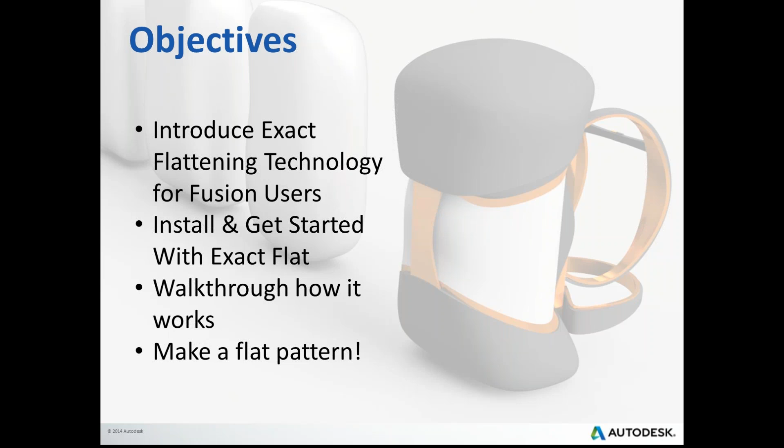So Cliff, go ahead and take away and tell us that process. Sure. So Mike just talked about how this is extending the functionality of Fusion. For those of you that aren't aware, the Fusion Exchange Store is intended to allow Fusion to rapidly grow and meet the needs of specific customers. In this case, those specific customers are in the soft goods industry.

We talk about the soft goods industry as products covered in fabric or made from vinyls and composites. So sporting goods, bicycles, helmets, furniture, boats, boat covers, automotive interiors, balloons, turbine blades, all of those types of things.

And the challenge has been that for soft goods manufacturing, the processes tend to be extremely manual and labor intensive. Just as we've been using 3D CAD and CAM in the past 20 years or so to accelerate both pre-production and final production of hard goods, we're now going to be doing the same thing for soft goods manufacturing. This enables companies that take advantage of 3D to get the same advantages for their soft goods manufacturing as they have for their hard goods manufacturing.

We're going to show you in this presentation, if you're involved in this industry at all and you're doing anything with soft goods, you know how long it takes to capture the information, get the dimensions, make a pattern, test it, redo it, iterate, and get it right. We're going to take you through a process that shows how we can do it, if not twice as fast, but in some cases 10 times faster than you're doing it today. It's a bold claim, and our experience has shown that it's not just a bold claim, but it's also true.

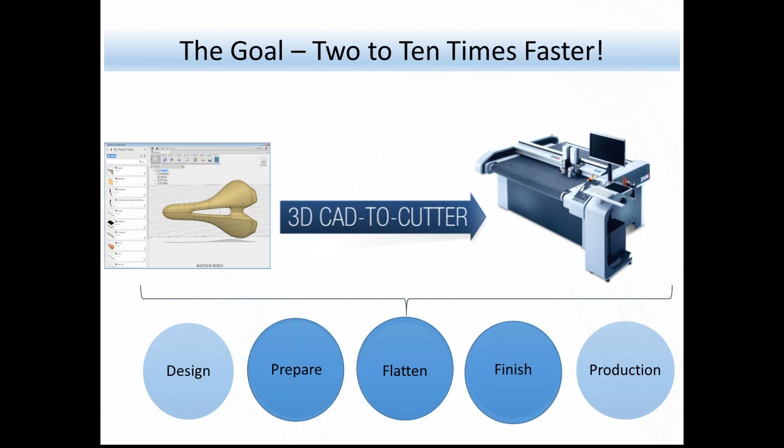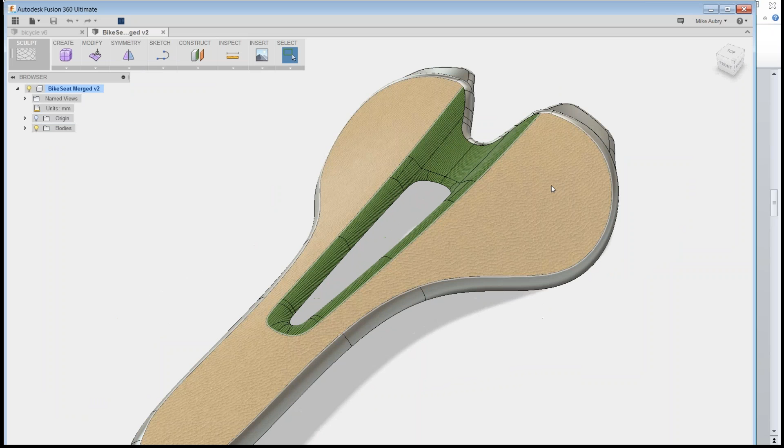Thanks, Cliff. So guys, let's show it off. We're assuming since you're on the Fusion webinar that you all have Fusion and love it to death, and why wouldn't you? I'm going to start with this bike seat, and where we're going with this is we need to make it so that for this leather piece, you can figure out what the shape would look like in a flat piece of leather.

So what we're starting with is something just created in Fusion, and we're going to leave the sculpting environment and go into the patching environment. This is the area of Fusion called the surfacing space, and there's really only one tool we need to use here. We need to merge all of these faces together into one face, which will be uploaded into ExactFlat.

Before I get started, I want to show you how I got ExactFlat in the first place. It's an add-in, and the way you get it is to go to the Exchange server. If you just Google 'Fusion 360 Exchange store,' you'll see the Autodesk Exchange apps, and there's an add-in called the ExactFlat Online Publisher.

Let me give you the link here. If you look in your chat panel, I'm posting this right in the chat so you don't even have to Google it, just click on it. If you install that, it's free first off, so you can choose between Mac or Windows 64, the same platforms we support for Fusion. Just go ahead and click the free button.

Then it'll ask for your Autodesk ID, the same one you'd log into Fusion with. Go ahead and sign in, and it'll start downloading, much the same way you installed Fusion, giving you an executable file. You'll see a little MSI start downloading, and you just double-click to install it. I've already installed it, so I won't go through that part with you, but I trust you'll be all right.

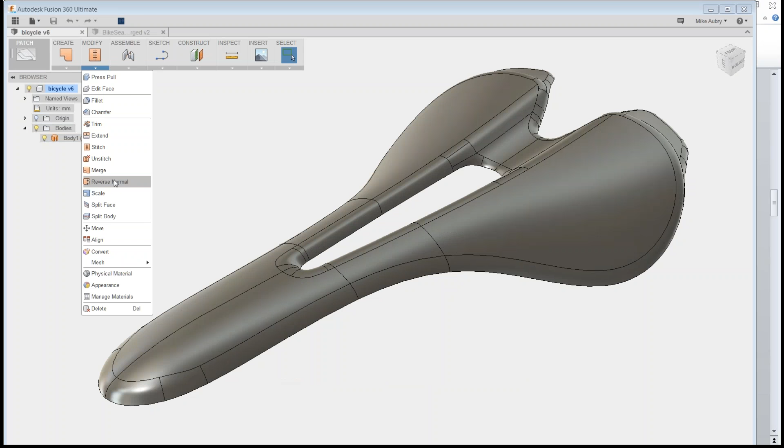Once installed, you'll see a button appear, 'Upload to ExactFlat.' Before we use that, all you have to do is merge stuff. I'm in the patching environment, and I'll use the tool called merge. Each of these little faces are independent faces right now, and we need to make them into one continuous face, which is what merge does. I'll just select these guys and click OK.

And look, now it's one face. We're ready to upload. It's really that simple. Just go here, upload to ExactFlat. I'm going to go log in, and it'll set it up. Upload successful, with an exclamation point because it's so happy.

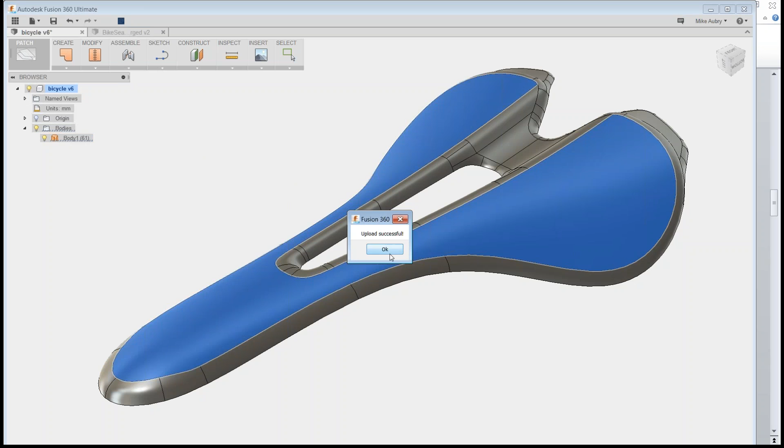That was probably uncalled for. But go ahead, Cliff. If you want to go back to that image you just had, Mike. Sure, so you're going to go through the whole process. Mike's going to walk you through the rest, but getting your surfaces right the first time is the most important part, and it's the only part where you'll have to use your engineering and design intent. The rest is pretty push button.

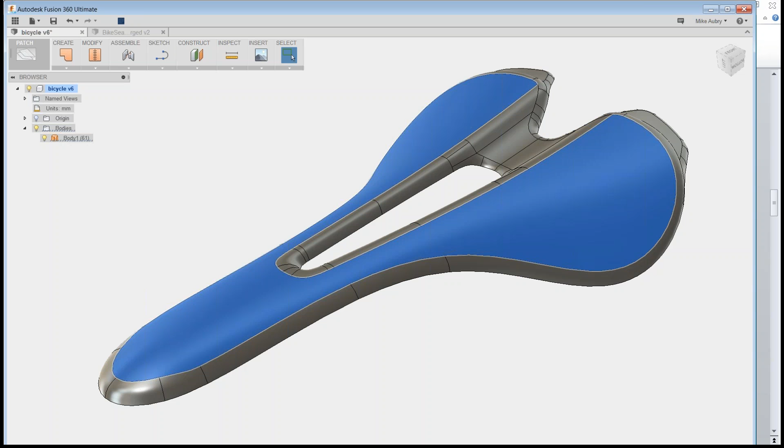Also, I want to remind everybody that as you have questions as we go through it, please feel free to add them in the chat dialogue. What Mike did is define a pattern piece, and also define where the seams are going to go, all just by selecting these surfaces and knitting them together. So in this particular piece, Cliff, time out.

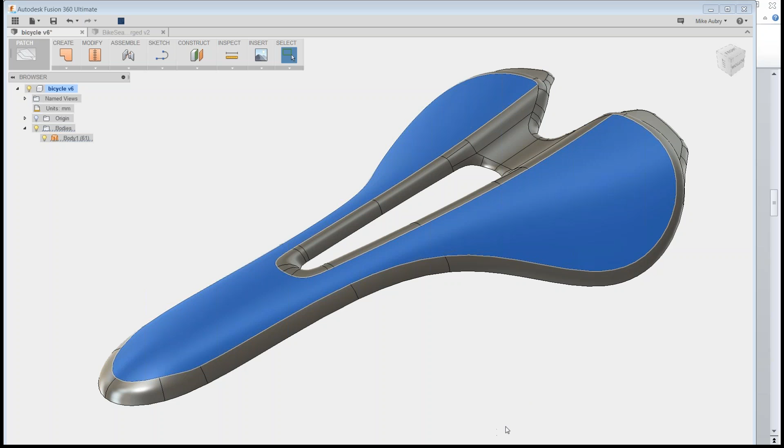Great, okay, so there's a question from Jeremy: is there a separate link for the OS X version of ExactFlat? I'm not seeing it in the Exchange. No, ExactFlat is a browser-only app. It runs on Chrome, Firefox, Safari — I've run it on my iPad. So there's only one version. There are 2 versions of the plugin based on your version of Fusion, the Windows and the OS X, but ExactFlat itself is browser-only, so it doesn't matter which tool you're running on, it's just a function of your browser.

Okay, Patrick has a reply to that — Patrick Ransbury: it's a bug in the store right now. When you click on the icon, you can select the OS X version in the store.

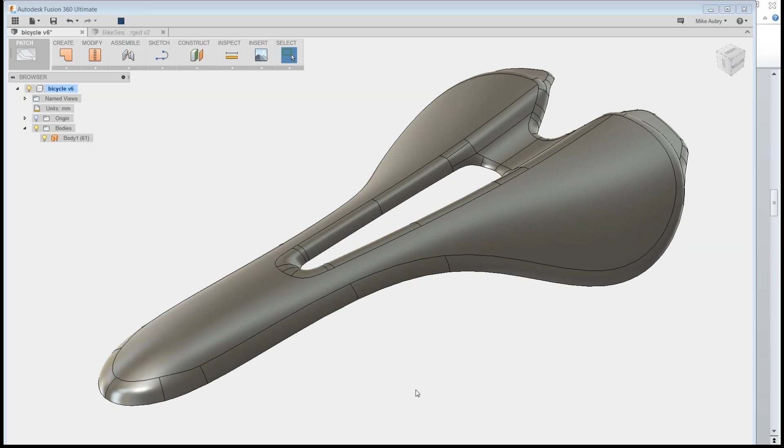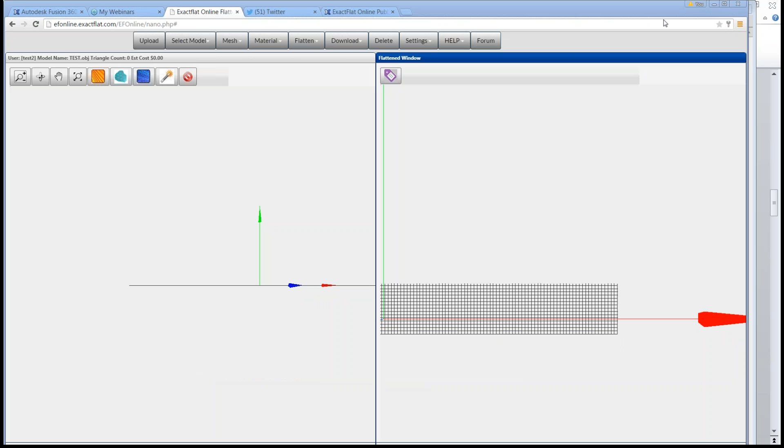We'll go ahead and move on. So to log in, once you guys are in the system, you'll get an email with some login information, and you saw me enter it in the Fusion side of things. The next thing is you got to log in on this side of things, and so I'm already logged in, so I'm just going to hit the refresh.

So this is ExactFlat.com online. That model will be uploaded, and so mine's just this test object. I should have given it a better name, but that's just what it is. And it'll upload, and that's what we've got right here. As you can see, it just brings in the OBJ file.

And then the way we're going to move through this is actually really super simple. It's just kind of a left to right process and how you move through this.

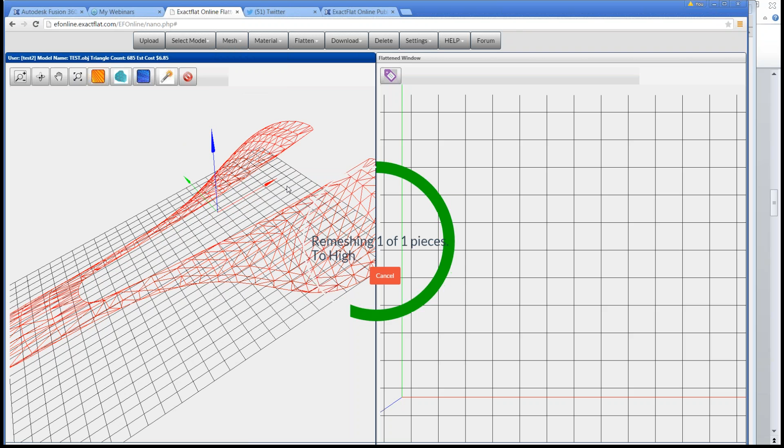The first thing we're going to do is I'm going to click on it, and then I'm going to optimize the mesh. This is a way of increasing the definition of basically how many little points are approximating that shape, and by adding more, it'll provide detail where it's needed to make sure that flat pattern provided is more accurate and true to the space. So you can see around the curves there's more density than in the places that are straight away.

That's a really powerful tool, mesh optimization. It's used heavily in structural analysis, and it's so exciting to see it used in this flat pattern technology.

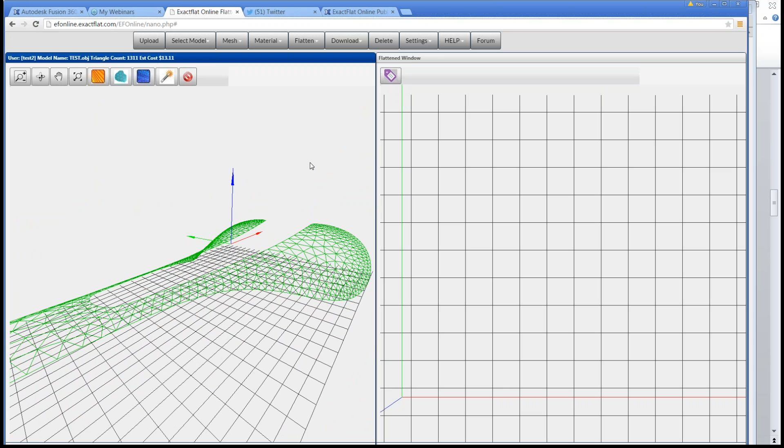So the next thing I'm going to do is I'm going to define a material based on how I want it to behave, and then just how it looks, so I can get a quick sanity check of it. So I'm going to apply leather to it as well.

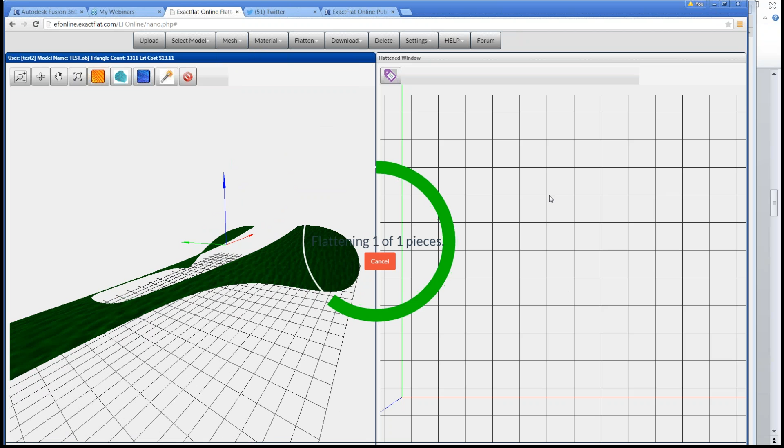And then this is the fun part. We're going to go and I'm going to choose to flatten it. So I'm going to choose this guy and flatten. And then you'll see over here in a second, it's going to take this curved shape and just take all those little nodes and flatten them out. And that's what we've got right here. Look at that, it's totally flat.

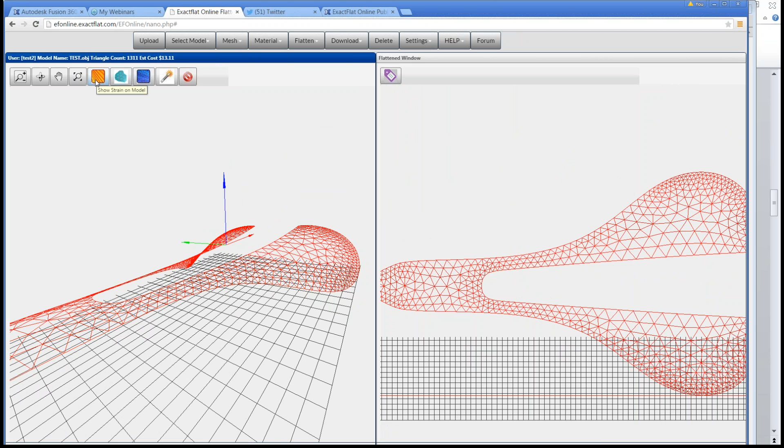Now, what we have to look at here is just because it's flat doesn't mean that it's going to wear properly or fit properly. Cliff, I don't know if you want to take a second to talk about what's simulating in the back end, but I'm going to turn on the strain model here and show what's going on.

A couple of things: while you can see this is a relatively simple model, you can see that all of this is pretty much happening in real time, even with other users on the service. Mike's also only got one part, but you can look at multiple parts all at the same time when you're doing your flattening.

And now what we're going to be looking at is the strain. This is something that's typically done, or this is usually an area where parts don't fit because the flat pattern isn't actually accurate. In this case, what it's saying is this flat pattern, while it may look like it's going to work, it's not. It's got some areas of very high strain, which means you're going to have producibility problems, and potentially it's not going to wear very well.

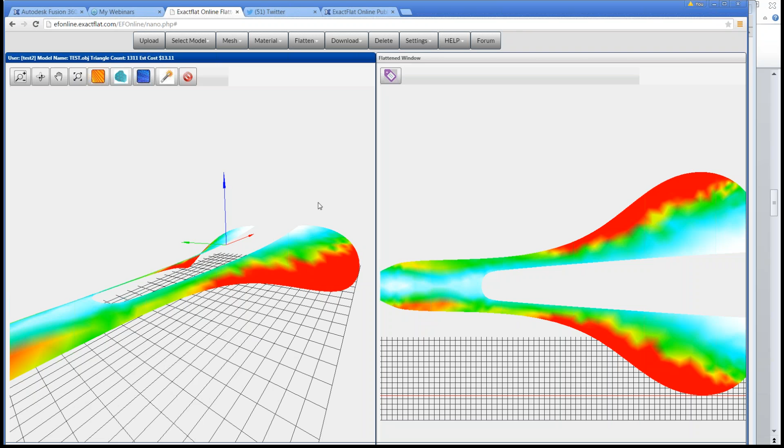So from the years of experience that the ExactFlat team has, we've put together some tools to help make a pattern that we are sure will not only fit right the first time, but will also provide you with the wear and the look and feel that you're looking for from your parts.

So you saw those areas of high strain, they were the areas in red. What Mike's going to do now is run the optimizer, which will allow ExactFlat Online to take the part, the mesh, and move the elements around slightly so that you get a pattern that will have the optimal performance. It won't have all of those areas of high strain. It'll show what it's usually attempting to do, which is get the strain down to really about 1% or 0% strain across the part. So that's what's going on right now.

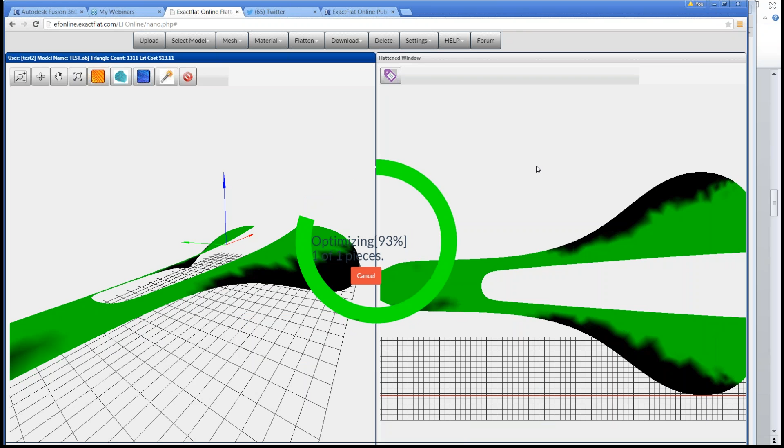As you can see, the mesh is finished, and those areas of high strain that were at the top and at the bottom on the back half of this part are no longer areas of high strain. We've now got a pattern that we're sure will fit right the first time, and that'll give us the wear characteristics we're looking for in our produced products.

For those of you that have been working with soft goods before, think about how you got started. You might have had to make a physical prototype, drape material over it, or do what we call drape and tape, where you measure and tape it. Or you've had someone with years and years of expertise look at it and do that first cut of the pattern, then iterate on it.

Now we've gone through all of those steps, and in these 10 minutes we've been working together, you've got a pattern that's ready for production. That's where we're very bold in the claim of 2 to 10 times faster, because you can see it right here in front of you. It's something you can expect to see in your own performance.

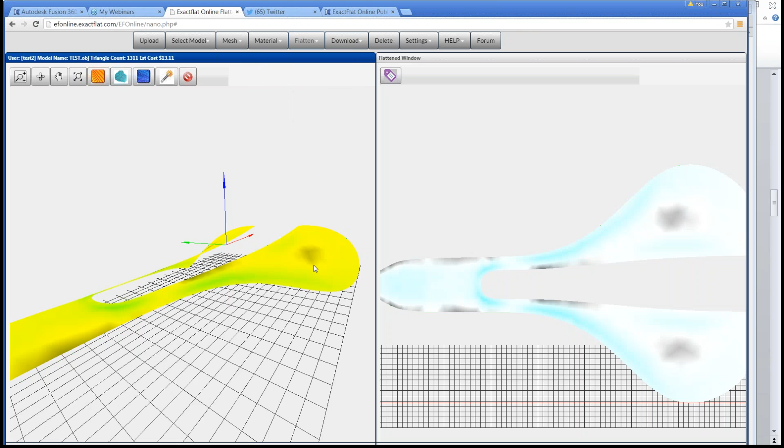For you guys following along, all I was doing here is clicking this thing under the flat pattern, which is the optimize one we just performed. Then for the analysis, I'm turning on the texturing and looking at the strain. So if you're following the clicks, that's what I did.

The next thing we have to do now is make it real. So we have a nice flat pattern here, and that's where the download comes in. We're moving to the next tab, and we're going to download it as a DXF. You can take this and give it to your guy and say, hey, load this up in AutoCAD and rock on it.

This is the area where, with ExactFlat, you guys as Fusion users get a really valuable preview, and this is generally where you're charged when you download it. For the preview here with Fusion, this is actually free for you guys for now.

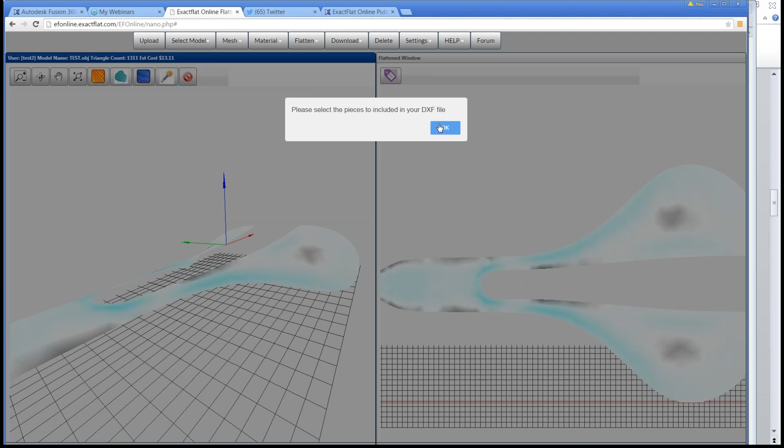So I'm actually going to just start my free download here of my DXF to check it out, and then I'll show you the end result. Just as I'm downloading it, I did this ahead of time.

I'm able to take that, and in your data panel, if you take that DXF and just say upload, navigate to it and pull it in, it'll upload as its own file. And that's what this is right here.

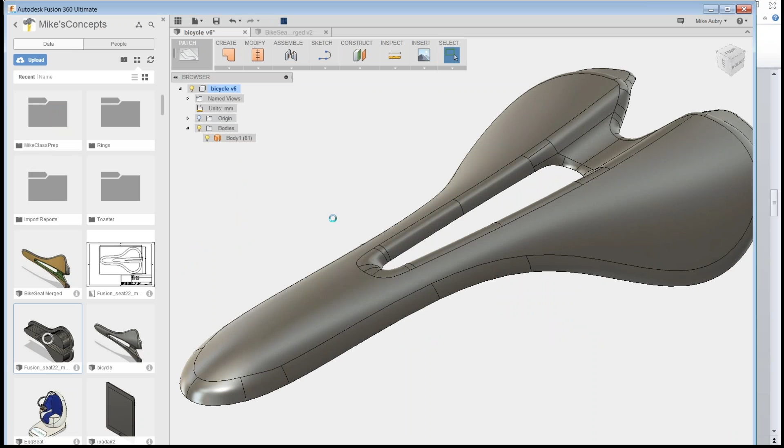So what I'm doing is taking that DXF, and all I'm doing is extruding out the face that comes from it. I can extrude this front face, and then I was asking, how do we get that overlap? I'm actually taking the entire continuous surface here and using press pull to thicken it.

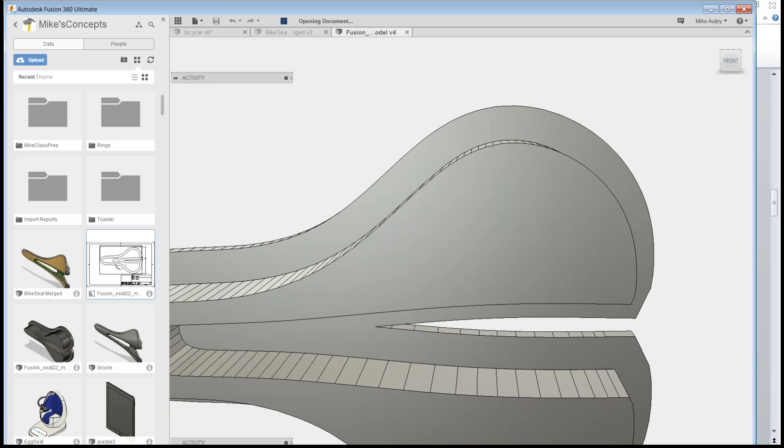The end result from this is you guys get a flat pattern that has the right documentation you can export and send to whoever's going to be putting the thing together or doing the cut for you. I just create a view here, output as a DWG or PDF, whatever. Get your quick dimensions here, talk about your seam allowance.

Man, this is so incredible. We've never been able to do this, and we just basically did this in a little 10-minute overview. I continue to be amazed by this.

So the DXF file also provides all the information you need for standard automated cutters. Once Mike was able to go in and add the seam allowance here, you can actually send this directly to cutters. He's created a drawing here, but he could have just left the seam allowance in and sent it to the cutter, and he would have gotten everything he needs.

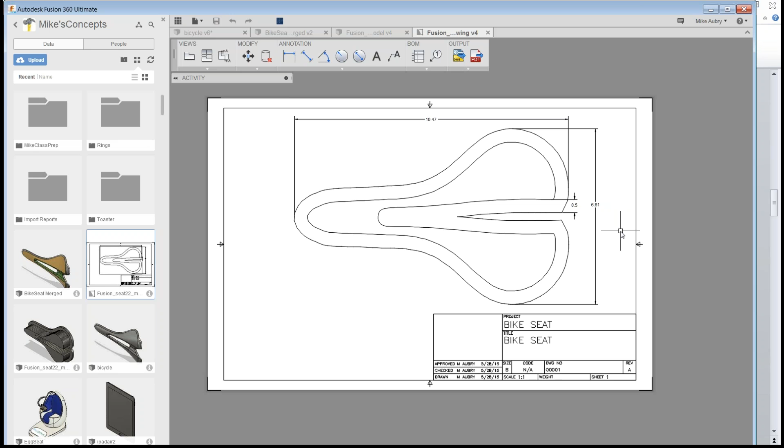As we go forward in the summer, you'll see more and more tools to make a lot of these things even more transparent to you. But the tool is completely functional. We have customers using it right now, and it's ready for you to start using it and trying it out on your models.

There's a question from Jean-Michel asking, are we generating UV map coordinates to export in OBJ-FBX for rendering? No, the quick answer. But I guess if I was going to do a rendering on this stuff, I'd just line up the two views and then overlap them in something like Illustrator.

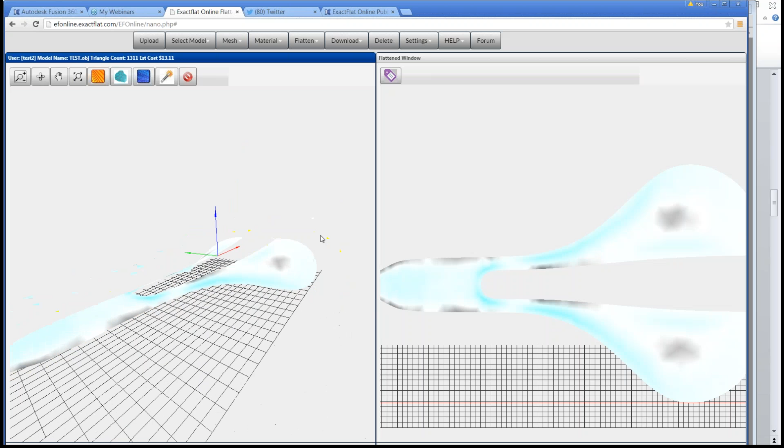Any plans at this point, Cliff, for being able to use that heat map on the analysis for visualization and rendering? Not for visualization or rendering, but if you go back to ExactFlat online, under that download you also get a report. It's a PDF report which provides insight into what your part was, what the grain was, what material you used, so you get additional information to help you decide or archive which parts you did and what settings you had on the entire product. But no, we won't be doing any additional rendering capabilities. It's really more of a pre-production tool. All that rendering should be done in the CAD tool.

And we do have texture mapping, but that's just for visualization. When you have lots and lots of different parts, or a variety of different parts, we've done the texture mapping just so you can tell one part from the other.

Question from Jean-Michel: optimizing placement texture is mandatory - do we have to assign a texture, Cliff? Well, you have to assign a texture because that is what ensures the performance of the material. So assigning a texture is what you're looking at, but what you really did was assign a material type. The texture is really just cosmetic only. What you have to do is assign a material type.

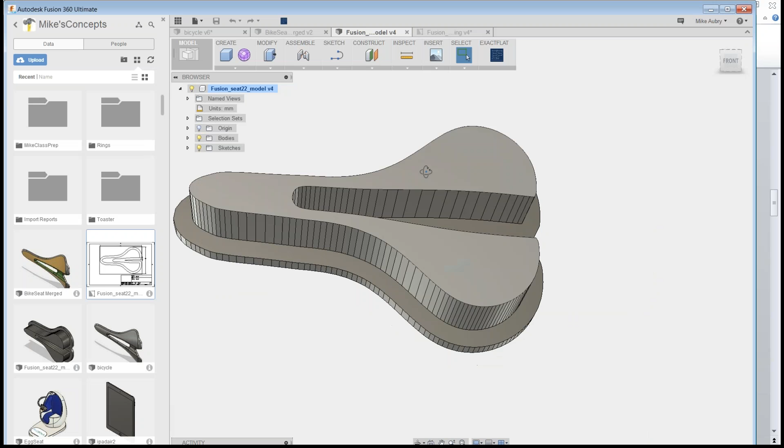As you can see, this isn't actually a flat document that I've made here. What I've done is through a series of extrusions - when it first comes in, the DXF, when you first upload it, it comes in as this sketch. So that's what actually comes in from ExactFlat, and it's like, hey, that's a flat pattern. To work with just the way Fusion's documentation works right now, to make it so I could do a seam allowance, I started off by taking that and doing an extrusion of it.

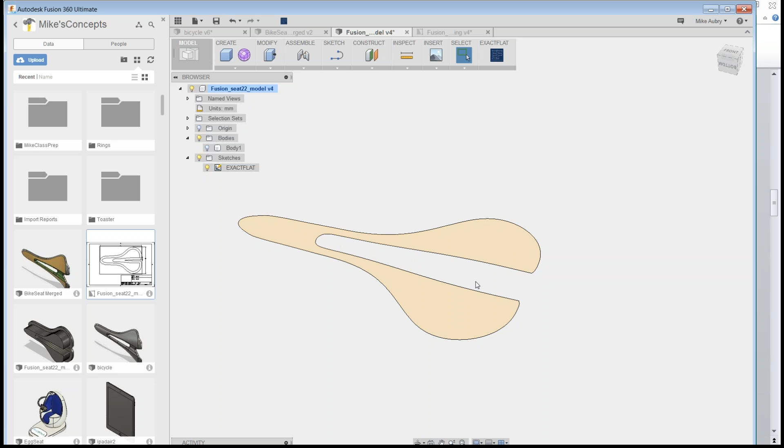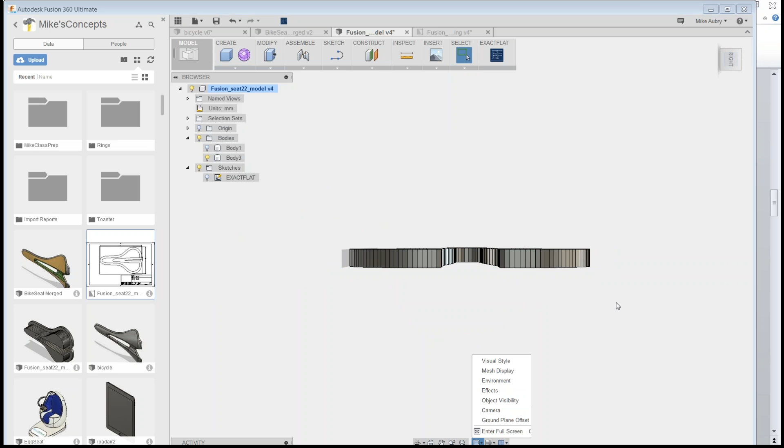Actually, I can just show you again, it's really easy - I just took this guy and extruded it up so I had something to work with. And then I went and took all the surfaces to make it so I had a seam, just taking the body faces. Let's actually do this guy - I'll take it out of perspective mode too, so I can do this selection orthographic, with this way on it.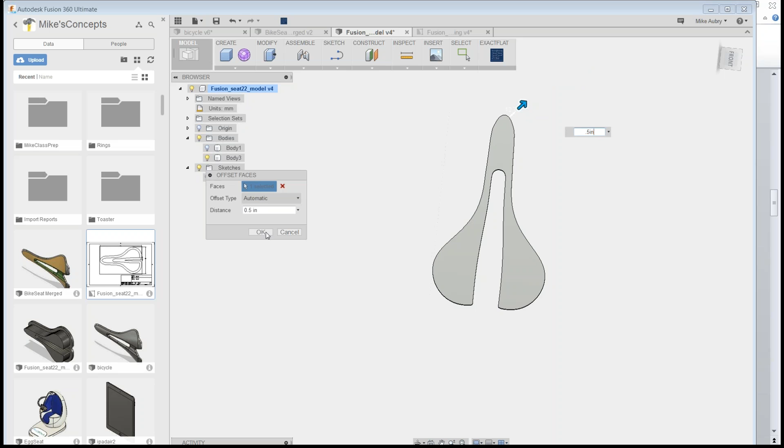So I select everything, and then I'm just doing a press pull on it, kind of taking and pulling this thing out. I can go 10 millimeters on it, so you can actually see where we're going with this - or in that case, I was doing a half inch for those of you in the States. And that's you can just kind of compare that to the before and after.

So we have, let's see, this before and after for both - actually, here we are, yeah, so there's the before and after you have in there. And that's just by having this top level view, right? It's just an orthographic, we're not doing a side profile, and it's silly - this is just a really quick way I found to make it work out, and it did exactly what I wanted to do.

I didn't overthink it - I've been using this about as long as you guys have, and I just thought it was a really slick way to get what I wanted. As Cliff mentioned, we're going to continue to work with ExactFlat and improving the workflows and stuff, but on that one, I mean, come on, the information's right there. That's pretty slick.

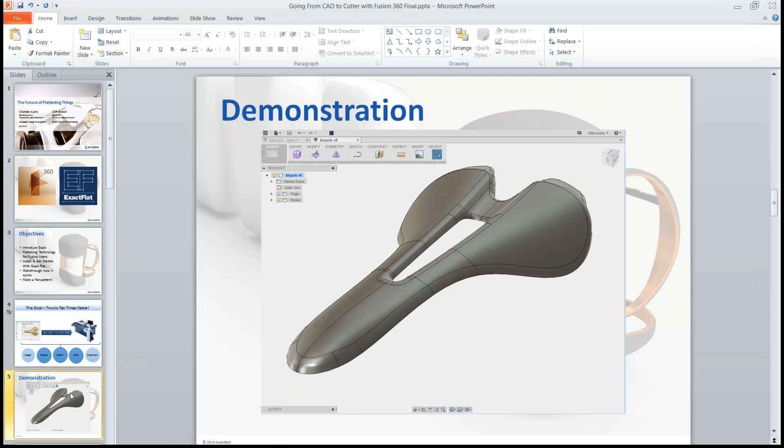I'll go ahead and go back to our deck, and we'll start summing up what we've shown today. So let's go on to this.

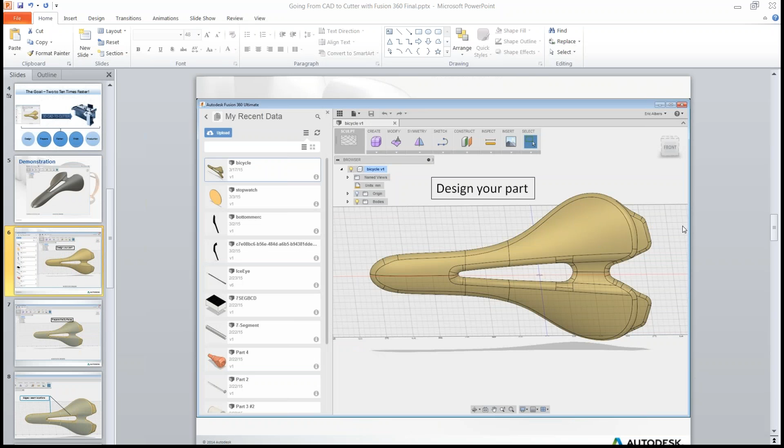Actually Cliff, do you want to take the summary slide? Sure, yeah, you ready? Sure, I'm ready. You're up. Well, why don't we go back to the demonstration slide, and we'll walk through a reminder of what we've seen so far. Sure, got it. Yep, there we go. Number six, sir. All right, we're in. Sweet.

Again, as Mike said at the top of the hour, this process is relatively simple. First, you'll go through and use Fusion to design up your part, create it any way you want. Then, next slide...

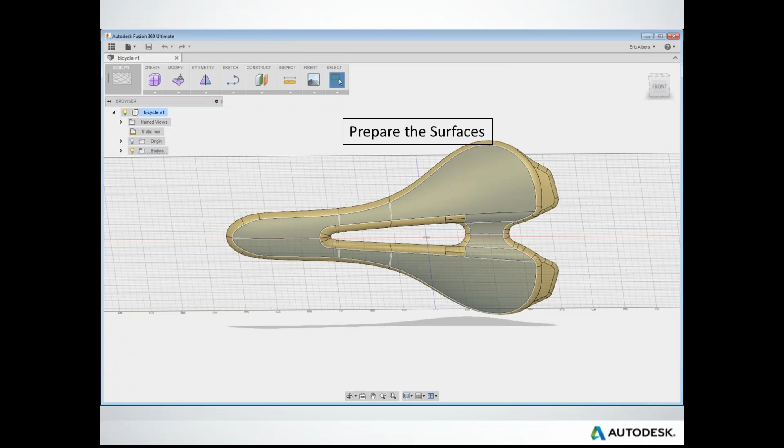Prepare the surfaces. This is the reason we want to talk about this, because it's the most important part of the process. Preparing the surfaces and remembering that the seam locations are defined by the edges of the surfaces that you've selected.

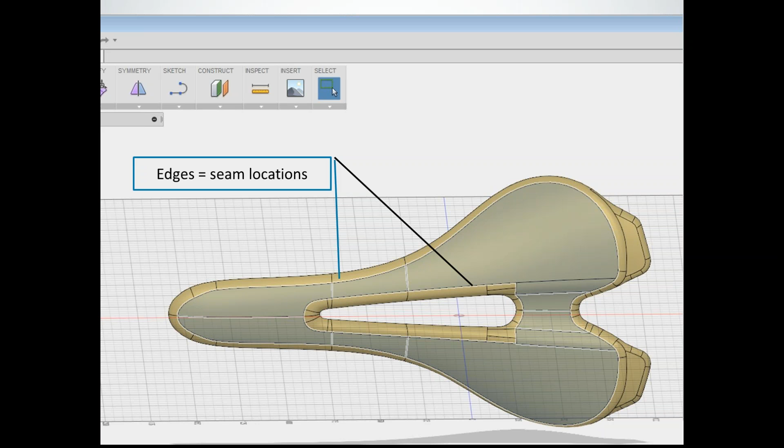Once you've done that, you'll use the export tools to export it directly into ExactFlat Online, which is the next slide. And here it will download right into your account.

So in order to take advantage of this, remember you need both the publisher tool from the Exchange store, and you need to have registered for the service at ExactFlat.com/online. Once you're into ExactFlat Online, you will refine the mesh so that it captures all of the geometry.

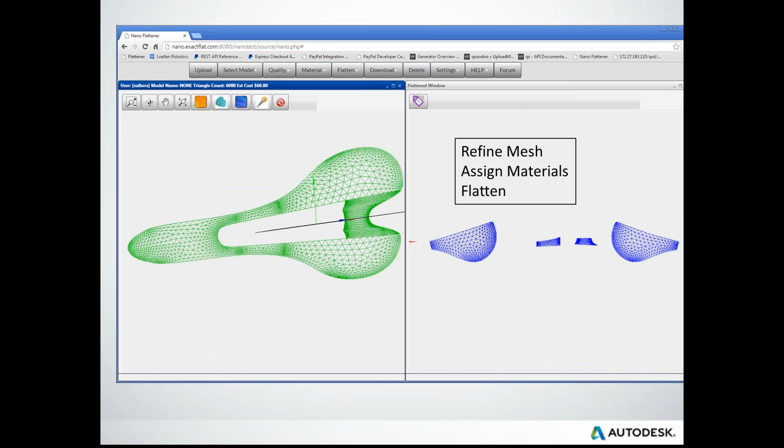You'll assign the materials, again, not the textures. The textures are really just cosmetic, but the materials determine the performance.

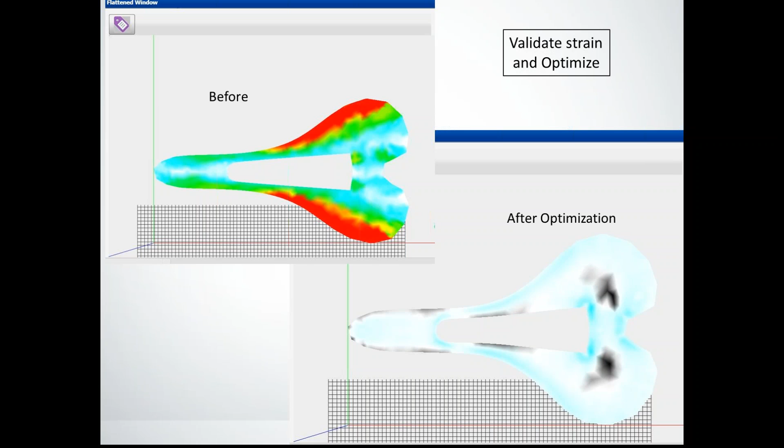You'll do the flattening, you'll optimize, and here's an example of the before and after. This can show up in the reports. All I did here was a cut and paste.

And then when you're done, you'll go back into Fusion to finish the pattern, to add the seams, add the markers. So that's a summary of the process.

What we'd recommend, or what we'd ask you to do, is go ahead and get started. You can go to the Exchange store, and remember, if you just typed in Fusion 360 Exchange in Google, it'll give you that link, but here's the link that Mike has for you.

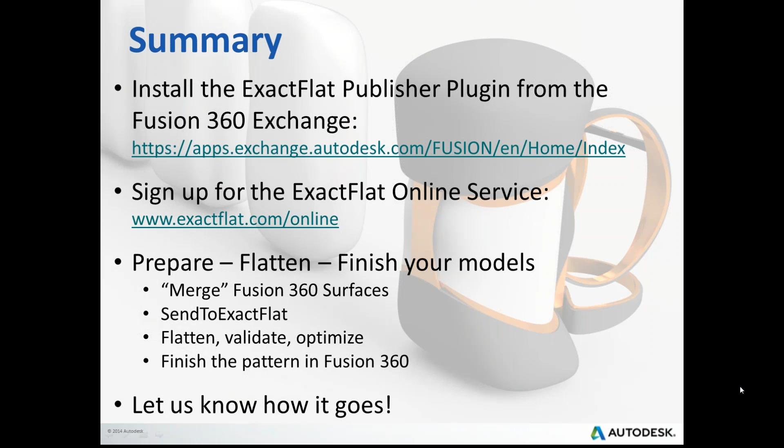Once you've done that, you want to sign up for the service at ExactFlat.com/online. Just click on the sign in register button and sign up.

What you must have is a unique company email address and a username. Please try to avoid commas in the company name, as it just creates problems with the service.

Then you'll go through the steps. You'll prepare your models and use the merge surface capabilities. That's the most important one, and the reason we keep hammering on that is because that's where customers have tended to have problems.

Send to ExactFlat, flatten, validate, optimize, and then finish the patterns in Fusion 360. The service is free for you to upload and flatten. You only pay when you download the DXF file. Everything else works exactly within Fusion 360.

We encourage you to go ahead and get started right now. Give it a try. There is an online forum inside of ExactFlat Online, as well as a help system and a support ticket. So if you have problems, you can go to the forum or send us a help ticket, and we will get right back with you and try to resolve your issues as quickly as possible.

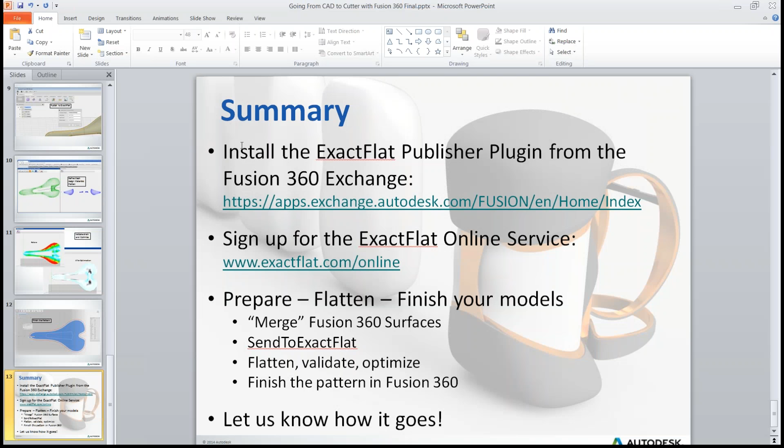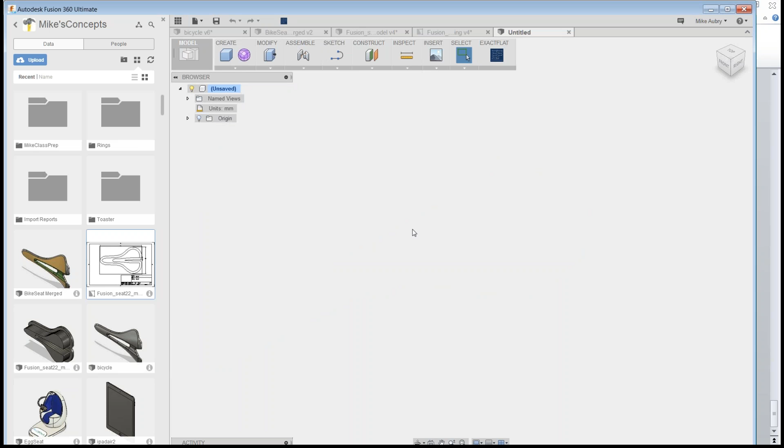Questions. Yeah, so while you're looking for that, Cliff, for the gentleman I'm working with who's looking for what he should be seeing to upload: when you launch a file, there's a little button up here, this upload to ExactFlat. If you aren't seeing that, the other place would be when you start a new design, there's a button right here as well. If you aren't seeing those, my suggestion would be close and reopen Fusion, because you might have installed the add-in, but the add-in isn't loaded yet. So that's the first thing we should check, quick try that.

So that's for Matt, and for Jeremy too, there's a couple of you guys trying it. And Kris has designed some shoes, that's awesome. Then Dave, you had a question of should you or must you use Fusion 360 with ExactFlat, and the answer is no. Actually, you can, as long as you can get an OBJ out of a program or an STL. I've found through experience that OBJ tends to be the more stable of the two. You can use it.

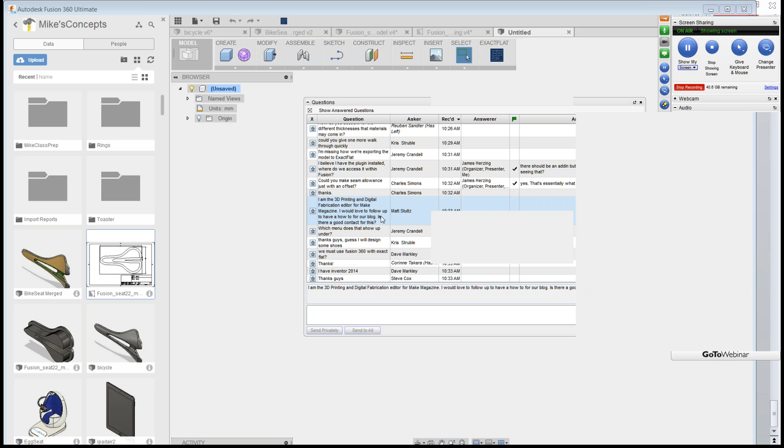So Dave, you made the comment you're using Inventor 2014. You absolutely can, you just log in direct to ExactFlat and then upload it. There's an upload button right here when you log in, this button right here, upload. That's what I've been using. But obviously, why would you use any program other than Fusion? I mean, come on, why would you use anything?

Okay, and Dan had success just closing and reopening Fusion, so that's good to hear. I think we got all the questions. You guys all good?